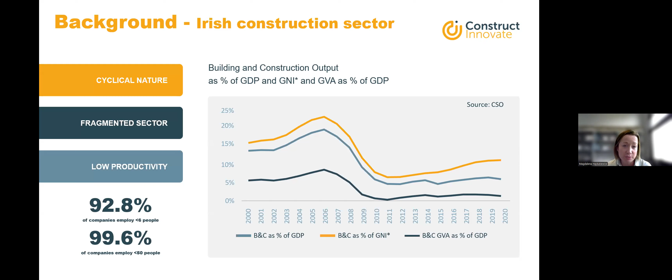The second challenge is that the sector is fragmented, with almost 93% of construction companies employing under 6 people. So efficiency and resources can be challenging when companies are small or micro companies. And finally, the construction industry has low levels of productivity. In Ireland, productivity in the construction sector is significantly below many other Western European countries, and it is also lower than in other industrial sectors.

Between the end of 2019 and the second quarter of 2024, the average labour productivity in the Irish economy increased by 6% across the country, but for construction, there was a 29% drop in labour productivity. So low productivity remains a challenge for Irish construction.

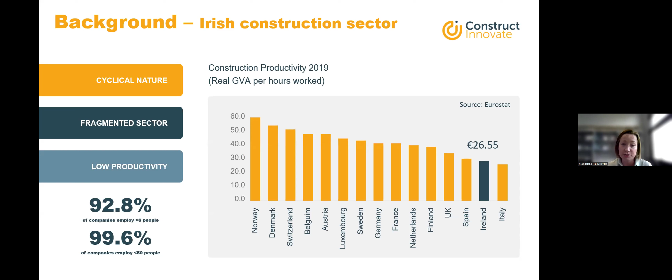There are 14 industrial ecosystems identified by the EU in their industrial strategy, and construction is one of them. Those ecosystems are transitioning due to the challenges we had with the COVID-19 pandemic, the Russian invasion of Ukraine, and the climate emergency.

Construction is one of those ecosystems, and it needs to undergo a rapid digital transformation and also embrace the circular economy principles. And the EU recognizes that need for a swift green and digital transition, as it showed in their industrial strategy, which was updated in May 2021.

And as part of the strategy, EU is working together with the member states and with industry stakeholders and developing transition pathways to identify the actions that are needed in different sectors that may give a better understanding of the challenges and opportunities that are faced by those sectors.

And for the construction, there are several tasks that it needs to focus on. So it needs to deliver building renovations faster than ever before. It needs to install renewable energy generation and manage those systems to help Europe use energy sustainably. It must continually provide monitoring, maintenance services, repair to the critical infrastructure.

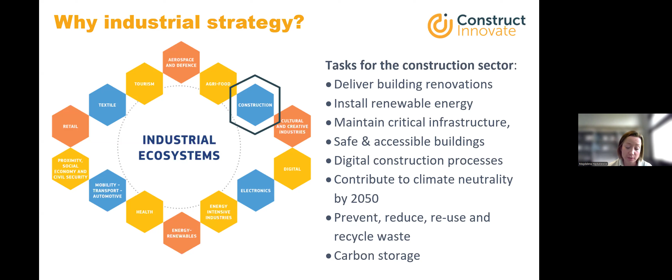So EU has this target of climate neutrality by 2050. And in recent years, different initiatives were launched that impact construction and the built environment. And those include the renovation wave, the proposed emission trading system for buildings and road transport, the new European Bauhaus, the climate adaptation strategy, and proposals also to revise some of the key legislation, such as the Construction Products Regulation and the Energy Performance of Buildings Directive.

And Ireland has the Climate Action Plan that sets a course for Ireland's targets to halve emissions by 2030 and reach net zero no later than 2050, so aligned with the EU targets. So many targets exist on how the built environment should transform in the future, but far fewer indicators exist on how the construction ecosystem should evolve to deliver on those objectives. And that's where the transition pathway for construction ecosystem comes in.

The development of a construction transition pathway started with the European Commission working with the Industrial Forum to develop a blueprint for industrial ecosystems, and that includes construction. And at the end of 2021, the Commission staff working document was published, which described the main challenges and opportunities for the construction ecosystem in Europe. Over 100 organizations participated in open consultation.

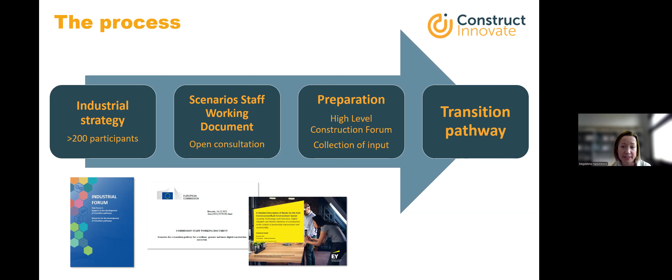And around the same time in Ireland, the Ernst & Young report was published. Some of you might know it, a detailed description of needs of the Irish construction built environment sector. And shortly after that, Construct Innovate was established as the first technology centre in Ireland for construction-related research.

So following that consultation at the EU level, after the publication of the staff working document, additional meetings and consultation sessions were organised, and all input that was received in this process resulted in a policy report, the transition pathway for construction, that was published in March 2023.

This transition pathway includes 6 building blocks, such as competitiveness, skills and talent, enabling framework, research and innovation technology, finance, and safe and fair built environment. And all those blocks must be considered from the perspective of 3 cross-cutting themes of green transition, which is the environmental sustainability and climate neutrality, digital transition, and move towards greater resilience.

Each of those building blocks has its own challenges and opportunities, which are well described in the report that is available on the European Commission website. But here I just want to flag a few actions for each of those building blocks that may be relevant to Construct Innovate members and mainly to industry.

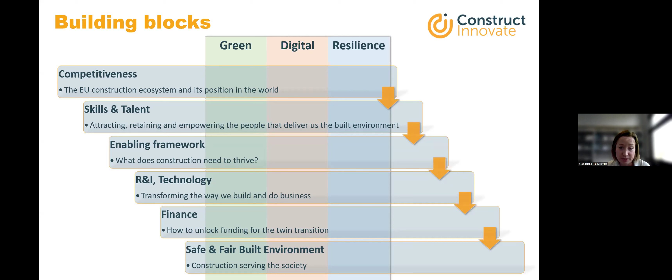So competitiveness, this building block is about assessing how construction is performing in relation to other industrial ecosystems and with third countries. It explores the dynamics of small, medium enterprises and startup community, all who are contributing to the twin transition. So when we're talking about twin transition, we mean green and digital transition and also resilience.

The recommended actions that I picked here, and there is a total of 14 of them under this competitiveness block. So the first one is investing in technologies that increase efficiency, and this relates to modern methods of construction, as shown in many previous presentations in this webinar series. Other actions relate to increasing the number of startups, improving diversity, and supporting local materials and products, and finally supporting international standardization. And that's one of the main challenges of the MMC sector, as mentioned before by our members.

The world of work is changing, and that is happening because of technology, demographic and climate change, and also the different geopolitical developments. Automation replaces some labor-intensive tasks. The population is aging, workers migrate, and the industry must reduce its environmental impact. So the talent pool of the construction ecosystem is shrinking, with aging workers retiring and young people reluctant to consider construction as their career choice.

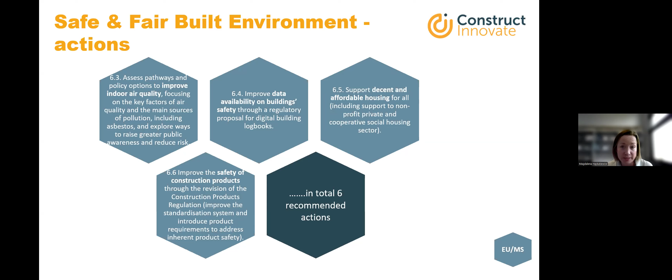So here I gave you a snapshot of the actions under the 6 building blocks of the transition pathway for construction. All the actions listed can be regrouped and positioned in time to create roadmaps for a green, digital, and resilient construction and built environment ecosystem. That's what's happening in different member states, following the guidelines from the EU, and in Ireland as well. The transition pathway for construction at the EU level and in Ireland is driven by digitization and sustainability, to improve productivity in the sector for the benefit of society.

So as you can see, this aligns very well with the vision and mission of Construct Innovate, an industry-led and industry-focused centre that enables research, development, and innovation, collaboration between academia, industry, and policymakers, and ensures sustainability, digital adoption, and resilience of the sector.

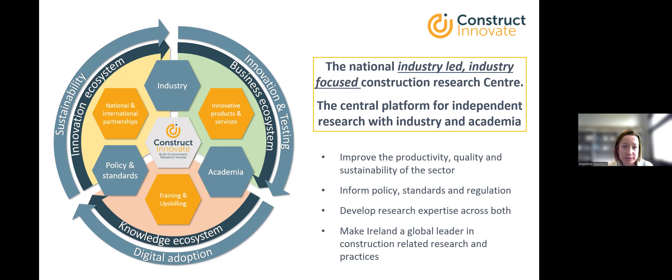Brilliant. Thanks, Magda. That's a great overview of what's happening in the EU and the pathways in the EU, but also how that applies to us in Ireland and how we're responding in Ireland. So I'm sure there's lots of people with questions for you.

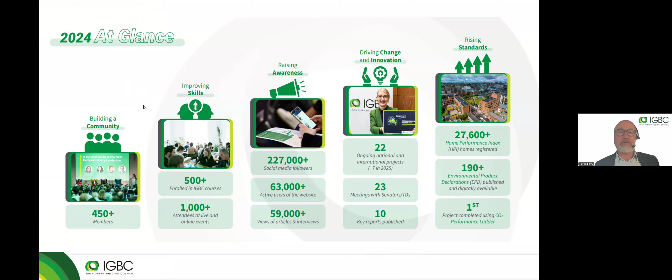Just a brief introduction to the Irish Green Building Council. We're an organisation of 450 collaborating members, and we work on skills, raising awareness through advocacy, and we do operate a number of programmes such as the Home Performance Index, EPD Ireland, and we are one of the industry research partner organisations with Construct Innovate.

You will have seen a couple of these slides before, and I just want to recap on where we are. The built environment is responsible for 37% of our emissions, and that breaks down into 23% from operation of our buildings and 14% embodied. Now, this is relatively old data. That's from 2018. So the embodied carbon proportion is likely to have increased considerably since then.

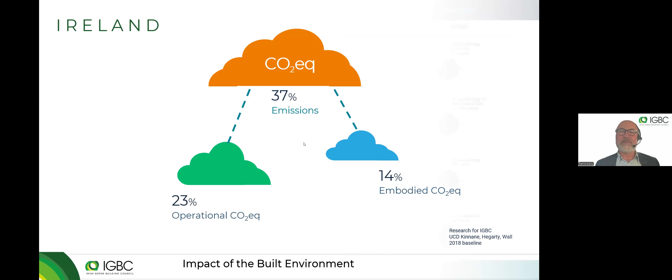We released a roadmap at the end of 2022, setting out a roadmap for each of the construction sectors, for architects, engineers, quantity surveyors. There's a roadmap here for every one of you. And one of my colleagues, Lenny, is currently reaching out to all of those different sectors and asking them what they need to act on the roadmap.

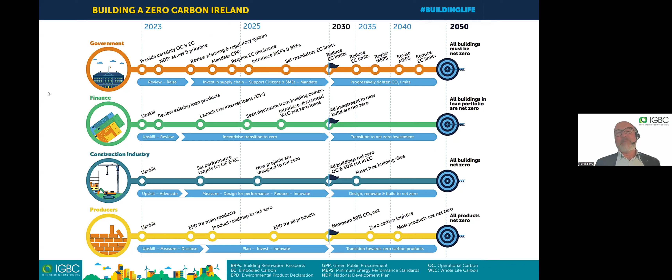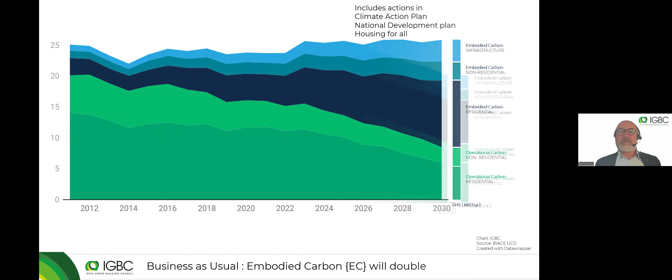I'm going to talk a little bit about how we get those whole life carbon emissions down, because that's a major challenge. We pointed out under the National Development Plan, in a business as usual scenario, if we built the 2020 Housing for All plan, even if we built just 33,000 houses the way we were building them, we would see an overall increase in carbon emissions, which means that we have to look at scenarios for reducing carbon emissions.

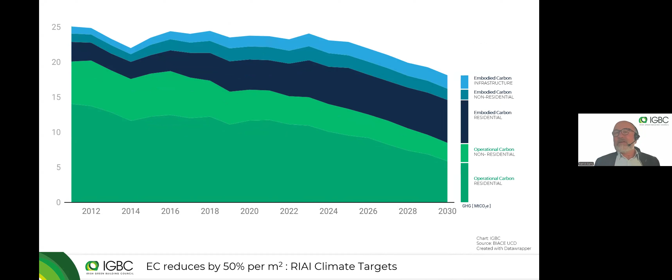So even if we reduced the carbon intensity per square meter, and met the RIAI climate targets, which are quite onerous, then we'd see a reduction, but it wouldn't be enough. So how do we get down to a 50% cut in carbon emissions from the built environment? And it's becoming all the more challenging as we increase our targets to 65,000 houses per annum.

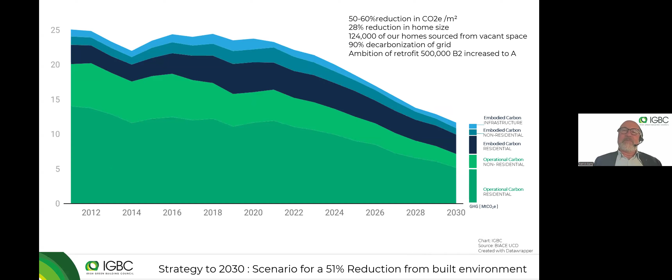But actually, where I would have been quite pessimistic a couple of years ago, so much has happened in the meantime in technology and ideas and new materials. I think there is the potential, because we probably need to be targeting something like a 70% reduction in carbon intensity, but that might just be possible over the next couple of years.

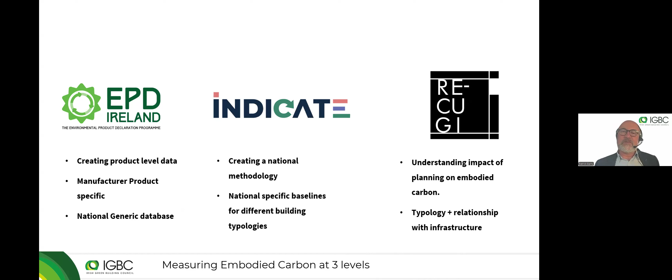So the Indicate project essentially helped us create a baseline for Irish buildings using a common methodology that we worked on with the University of Galway and through Construct Innovate. And that gave us an indication of what the carbon impact of different types of buildings is currently, and gives us an idea of where we need to get to over the next 5 to 6 years.

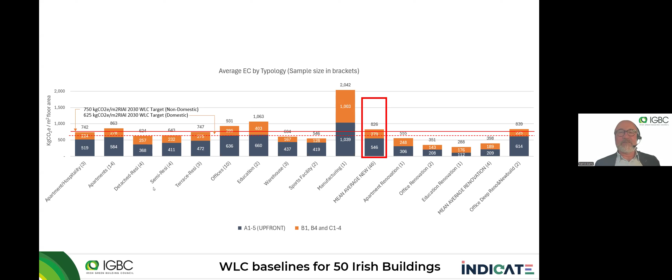I'm not going to go through the detailed figures for those benchmarks, but it's probably more instructive to see where most of the carbon emissions and most of the mass of our buildings is in those 50 new buildings. In those 50 new buildings, 3/4 of the mass of the buildings is from concrete, with metals and other materials like brick making up the balance. And why is that important?

We're also doing a circularity roadmap at the moment. So we're not just thinking about the carbon emissions, we're also thinking about the actual resource. Where do we find these resources, and can we optimize resources like concrete and sand, all of which we assume are in plentiful supply, but they do have considerable impacts to extract, not least on biodiversity.

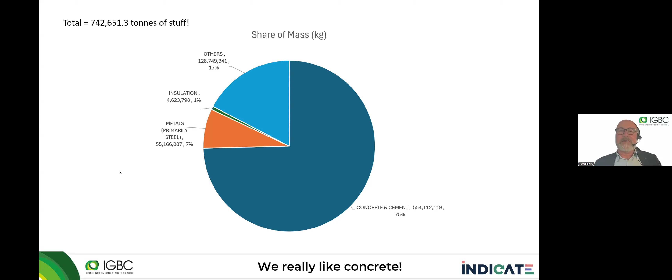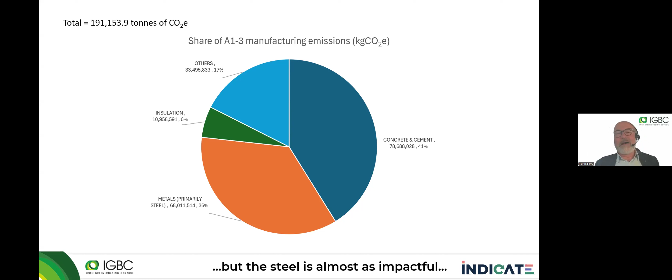And when we look at this from the carbon emissions of these 50 buildings, we see that concrete and cement is still the largest at 41%, with steel being 36%. And surprisingly, insulation has quite a significant impact when you look at it. It's quite a light material. You don't even see it on the mass diagram there, but it's a significant impact in carbon emissions.

So how do we get down to, we're targeting something like a 70% reduction in carbon intensity. How would we go about, or even a 50% reduction in carbon intensity from all of what we are going to build over the coming years? And again, you'll see the idea of a pyramid. It really starts with sufficiency. How can we be clever by building less? How can we find ways of intensifying the buildings that we already have, so that we don't have to build as much?

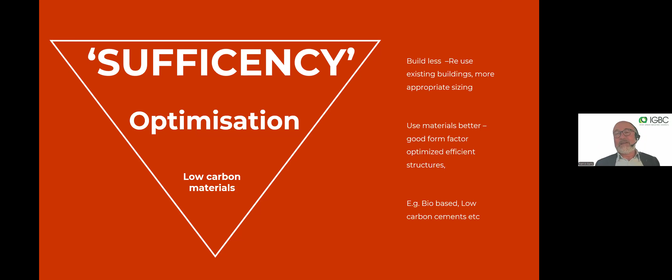Then the next step in the pyramid is optimization. How can we use less materials? Can we optimize the structure? And I know the Institution of Structural Engineers in the UK has done fantastic work there. I don't know if you've seen the Build Opt project, where the UK government funded a project looking at how you can optimize the actual structure itself and the layout of the columns and the bracing. But there's also other measures that we can use through 3D printing that can optimize the quantity of material used. And then finally, the lowest part of the triangle is that the materials you use themselves are low carbon.

So one of the low-hanging fruits starts with the infrastructure, and we haven't really started to think about that because we've been looking at the buildings. So even if you're looking at the infrastructure, how you lay out developments, is there an optimum way that you can lay out the roads? So that not all of the roads need to be for heavy vehicle use, say in a housing estate, and could we optimize some of the roads and pathways for lighter vehicles like electric bicycles? Can we optimize car parking and reduce the quantum of materials going into urban development?

Again, this project carried out through Construct Innovate, Viable Homes, looked at the difference in infrastructure according to different typologies. And you can see the lower the density, the greater the ratio of infrastructure to the actual buildings themselves. Then it decreases right up to apartment blocks. And it's interesting talking with developers that actually the greatest cost in lower density development tends to be the infrastructure now rather than the homes, because they've optimized the units themselves, but they don't have as much control in optimizing the infrastructure that's required by the standards.

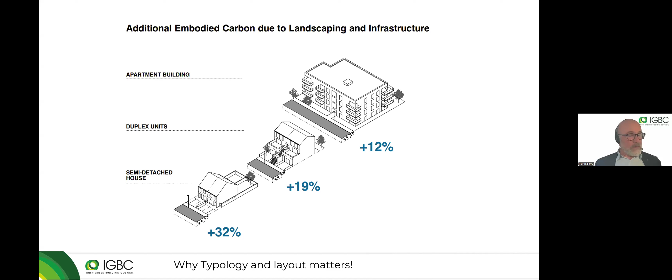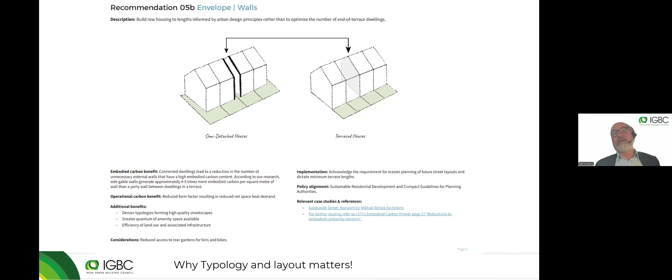So there's obvious simple ways we can change the typologies. Rather than having lots of detached houses and semi-detached houses, we can put them together. That eliminates walls. It reduces foundations. It reduces the length of the pipes and footpaths that you need because you're pushing the houses closer together. You don't need as much infrastructure. You can look at the car parking, perhaps moving the car parking slightly away from the houses. You can group them. Then maybe you don't need the same level of road infrastructure. So there's huge low-hanging fruit there if we look at the layouts of developments.

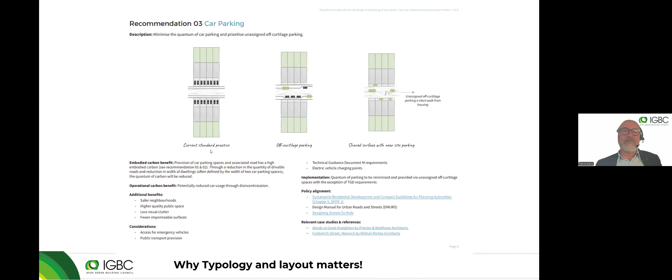A very obvious one. And a lot of this work was done by Philip Comerford and the team in UCD with Oliver Kinnane. They did an immense amount of work looking at every manhole. They downloaded standard manholes and calculated the impact of a manhole, and the impact of the road build-ups that we typically put in per square meter in a housing estate. So they calculated all that out. And this is just one example of the way we put in infrastructure. It's different for houses because we put in a last manhole for every single house. With an apartment block, it might be just one manhole. And when you think about that, that's 1.2 tons of carbon per manhole. So there's lots of things that we can optimize.

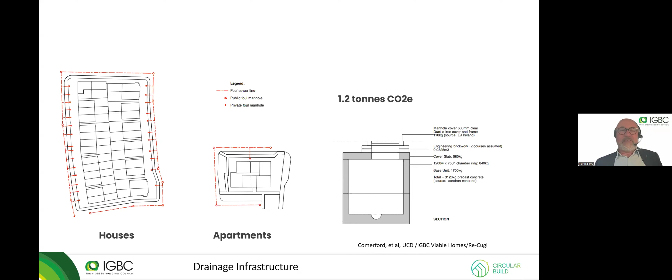And I can talk about the impact of this, but what could this look like? Well, this is an example that's already under construction in Copenhagen, where it's built on a municipal dump. It's built on landfill, and it is close to a metro station. They've backgrounded all of the car parking. They've hidden away all the car parking in a multi-story car park at the entrance, and they've cut down the amount of infrastructure to the minimum. They've used swales instead of attenuation tanks.

Actually, on that study from Construct Innovate, the attenuation tank accounted for 2.4% of the entire embodied carbon emissions of the entire development. But they're using nature. So they're bringing biodiversity right through the scheme. The only roads through it are narrow cycle tracks, a minimum of vehicle access needed for fire and obviously other utilities. But it's an example of where we might be going, and it's clearly a more beautiful environment to live in.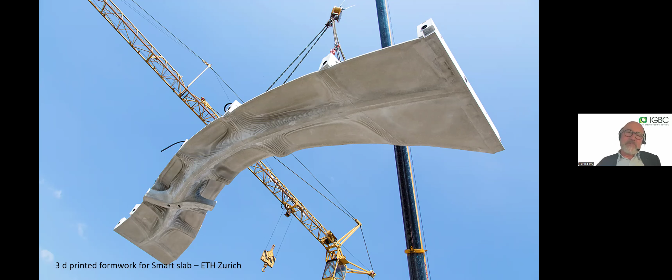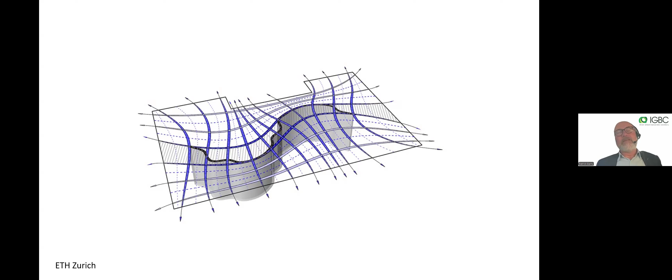But it's not just timber. There's ways that we can optimize concrete, and this is an example from ETH Zurich, who are building this demonstrator to show all of the benefits of combining digital parametric design, where you're optimizing the structure to absolutely bring to a minimum the amount of concrete. So, for example, this is a 78 square meter slab. The total weight of it is 15 tons. It's got a 4.1 cantilever. So it's 1/3 of the mass of a typical concrete slab.

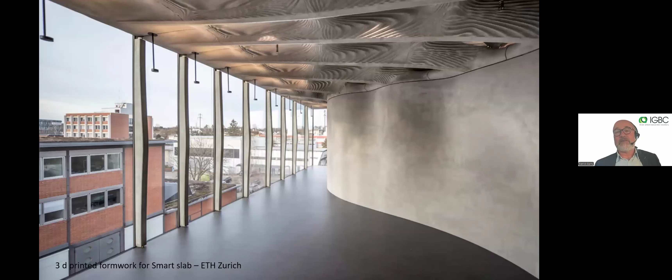So when you think about that, if you combine the fact that you can now use clinker substitutes that can replace up to 70% of the clinker, combine that with a 70% optimization. If my maths is correct, and correct me if I'm wrong, that means there's a 91% reduction in carbon intensity in building that. If you combine those, you're combining digital, you're combining low carbon cement and concrete techniques, and you're combining parametric design. And you're getting very interesting shapes. Now, this is a little bit extreme, but we don't have to go that far. We can apply it to ordinary buildings too.

But of course, we've maxed out optimization in the last slide, but then we have new options that are coming through. We're not really yet realizing the potential to use biomaterials in Ireland, and we have plenty of agriculture. We can offer farmers the potential to diversify on their farms and create new agri-crops.

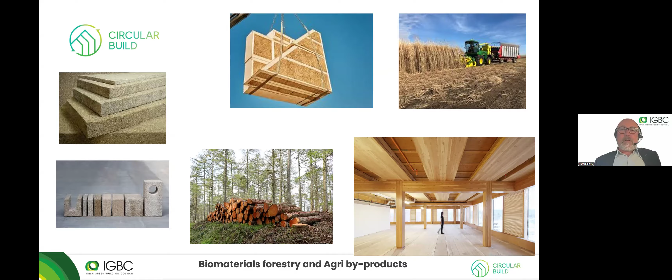And again, currently the Timber in Construction Steering Group are looking at use of timber at height, and this is an example from Stockholm where they have built 5 stories above an existing 2.5-story warehouse. And this is combining strategies. You're using what you already have. You're using low carbon materials then to intensify the use of that. And then you're using that existing infrastructure that's already there, the roads, the drainage. So this is the optimum way of reducing carbon by multiple strategies combined.

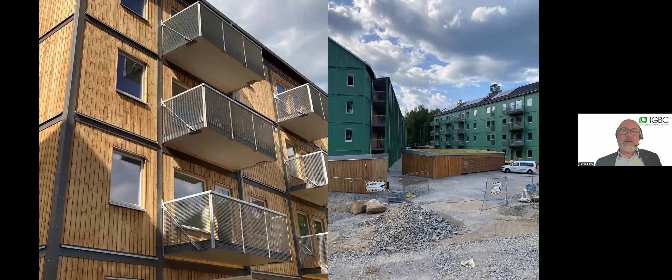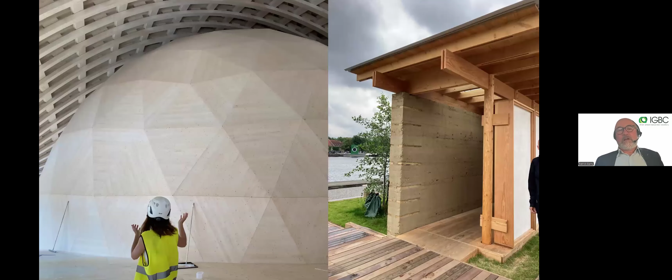And again, the use of parametric design, of course, can be combined with new biomaterials. This is a cross laminate. Sorry, this isn't CLT. It's cross lumber. It's cross ply, where you're using ply in cross ply to achieve very interesting shapes.

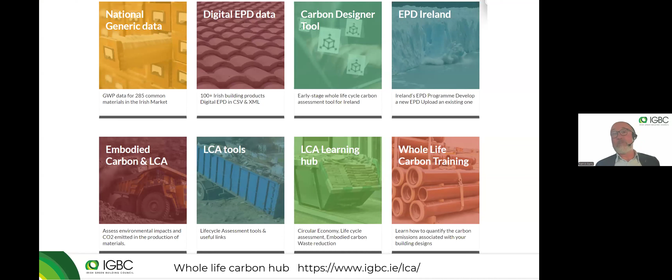So the possibilities for construction, it's an incredibly exciting time if we realize them. And it gives me a lot of hope. Whereas a couple of years ago, I said, this is really difficult. How are we going to make these reductions so quickly? But I do think it is possible if we apply all of these techniques in combination.

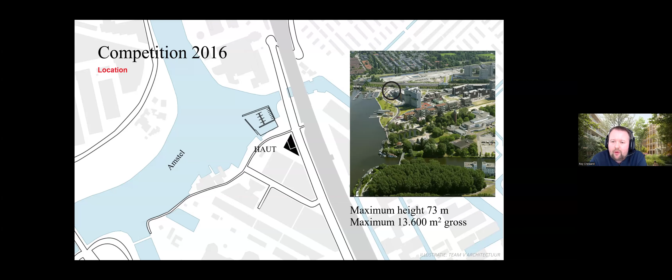And in order to secure, let's say, development of this plot, the municipality set some rules, and they asked teams to come up with a strategy, and you were to be scored on these criteria. So the design of the building was about 40% of the points. The approach to sustainability of the building was about 30% of the points, and then the associated bid for the land and the rights to develop on this plot were another 30% points.

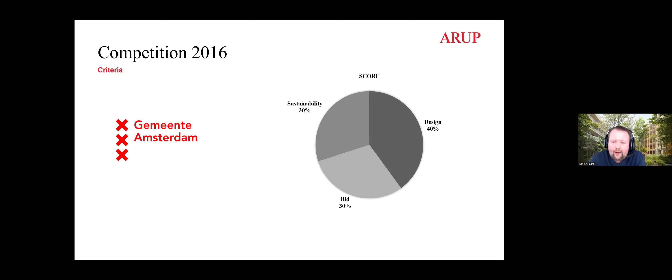We teamed up with Lingotto, who is a Dutch developer, and Team V Architects, which is one of our architecture friends in Amsterdam. And as Arup, we supplied many of the engineering services on the project. And as a team, we felt that the key to winning this project was to come up with a structure that used as much timber as possible. This was back in 2016. Timber was very much talked about in the Netherlands, but the largest building constructed at that time was about 6 stories tall. And we wanted to really make a statement in terms of applying this material in construction.

So the idea of our team was to use as much timber as sensible, whilst not compromising on the architecture and the views of the buildings. These were going to be very high-end apartments, so we wanted all the apartments to have excellent views, so we didn't want to have any structure on the outside of the building, but very much centrally located, and also work within the constraints of the site, which had quite an awkward triangular shape. There was a large segment of cables under a part of the building, which was a constraint as well, and we really wanted to work with those constraints.

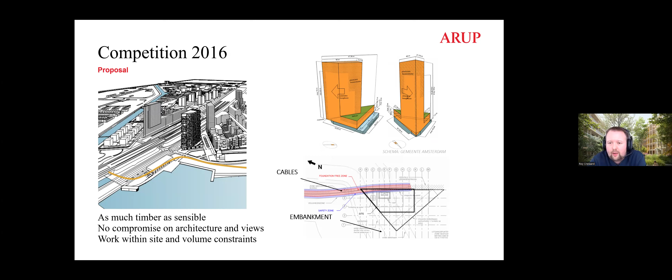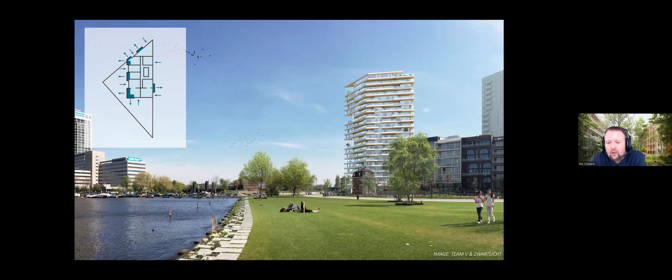So in the end, we came up with a design that you see here, which was one of the images that was submitted during the competition, where the use of the timber didn't really impact the design much. So we really had clear views all around the building and a very strong architectural expression. So why didn't we do this before? Why was this our first project to have a 70-meter tall tower in timber?

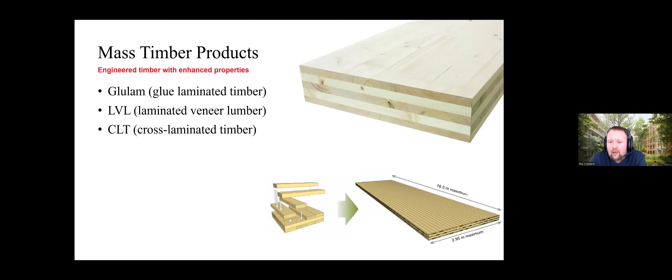Well, first of all, we've seen the rise of mass timber products, which are products that have much increased properties compared to traditional sawn timber products. These engineered timber products really allowed us to use timber at this scale. Furthermore, as you are probably well aware, the modern ways of fabrication have really helped us to realize these kind of projects.

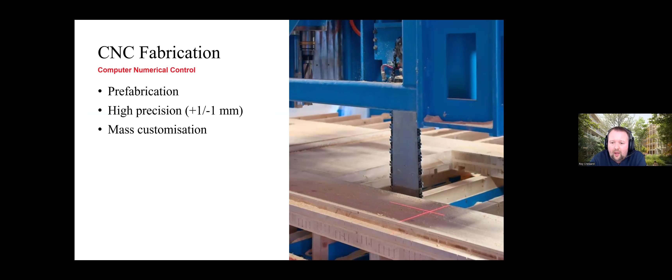For example, with CNC machines, you can really have a high degree of precision and apply mass customization to the structural elements required for these projects, and apply that in a prefabricated manner where floors and walls and columns, etc., arrive on site and can be installed right away. And finally, one of the enablers for this project was new connection technology.

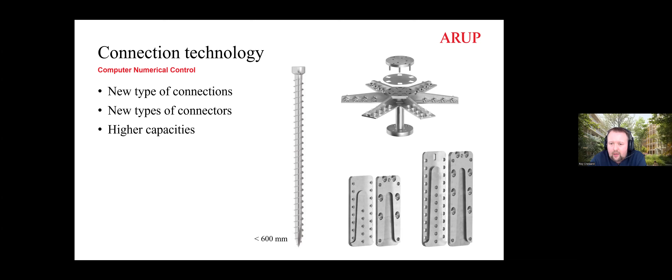There's been a real increase in the technology of timber connectors, with higher and higher capacities being possible, really tight tolerances, and this is constantly evolving and really helps us with applying timber to this scale.

So for the design of HAUT, we applied a hybrid structure, and the reason for that was that we initially pushed for as much timber as possible, but in the end we settled for CLT walls, a concrete core, and timber concrete composite floor. So that's a timber slab with a concrete topping that really helps in the structural performance.

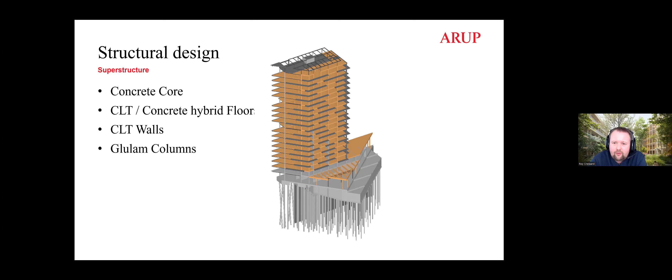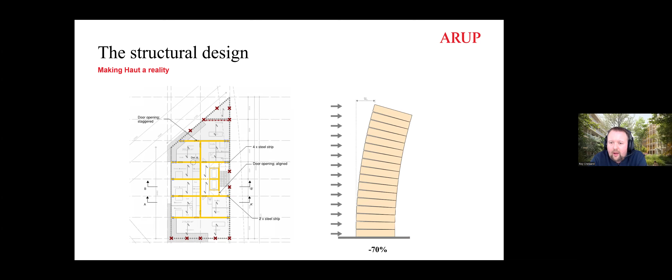So why did we end up with this system? Well, initially we really pushed for a full timber design. This is what was used in the competition stage as well. But we found out that if you stack all these structural elements to this height, a timber structure is made out of all these individual panels with all these joints, and they all have connections in between them. All these connections have a bit of slip in them. They have a bit of give, and that actually reduces the stiffness of the whole quite significantly.

So we investigated a couple of options where, for example, we used steel strips and ties to stiffen up those timber walls, maybe pre-stress it to avoid those deflections. But in the end, we found that we had to add so much steel that it basically offset all the carbon and the environmental gains that we had by applying the timber.

So instead, we opted for a very small and compact concrete core, which also helped us, for example, with acoustics. Put all the vertical transportation in there, all the bits that vibrate, and it's quite nice to have that compact in that central core.

But that core is supported by a number of CLT walls that sit next to it, and that support the structural system, especially in torsional modes of the building because of the asymmetric position of the core. We use the CLT walls for that. So in the end, this hybrid solution with concrete applied to sensible locations reduced the overall environmental impact of the plan.

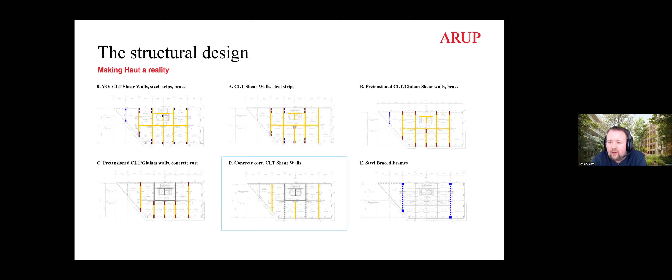So we had a number of design challenges during the development of the building. One of them was the differential settlements of the building. You can imagine that if you use concrete elements next to timber elements, there's going to be differences in settlements due to the creep and shrinkage of the timber and the differences in loading. So this was actually a big concern for the contractor, but also for the architect who worried about finishing delaminating from the walls and such.

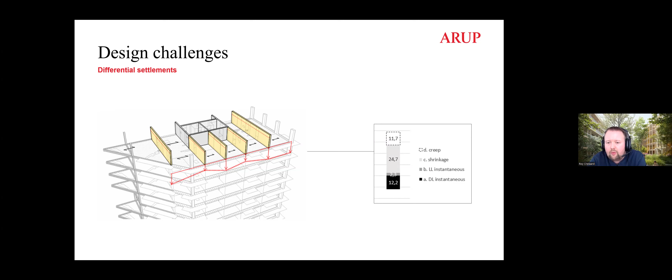So we performed quite a detailed analysis of this in time, where we looked at different scenarios, applied the loadings at the right times to really understand the differential settlements and the way they evolved in time. And eventually we were able to much more accurately estimate these differential settlements to be about 20 millimeters instead of our initial estimate of about 50. So that made it much more manageable.

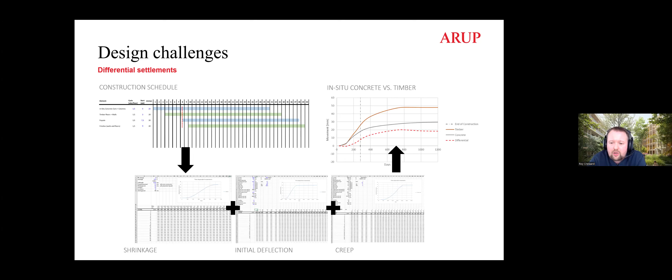And we also introduced some connection details that would be able to take any differential settlements and distribute them across the floor, which resulted in much smaller rotation. So that was solved in quite an elegant way.

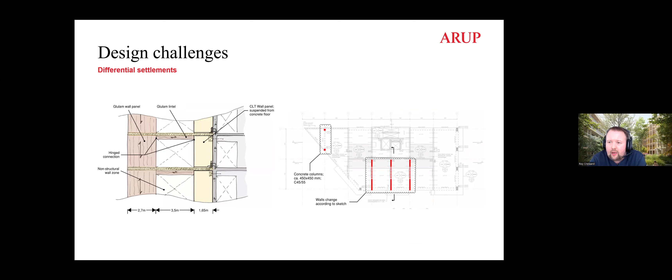Furthermore, for these types of buildings with timber floors, footfall-induced vibrations are a big concern, especially for apartments like this where they are quite high end, so the requirements are quite tight. Which was one of the reasons why we opted for a composite slab, where there's actually a CLT soffit, which is then with shear connectors connected to a much thinner concrete layer on top, and they work compositely.

So it tremendously increases the strength and the stiffness of the floor elements, but it also adds a bit of extra mass, which is really beneficial for your vibrations, but also, for example, wind-induced vibrations for the complete tower. That small layer of additional mass really helped us in that structural performance.

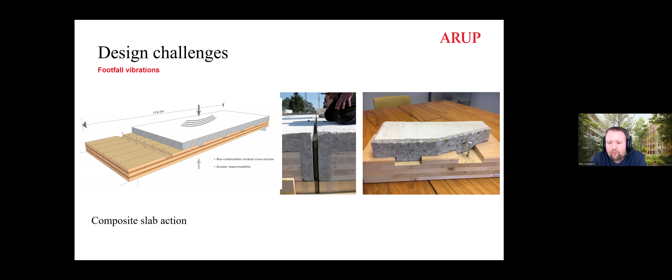It also really helped for acoustics, which is another issue that you need to tackle with these timber buildings. Timber has a much lower mass, which means that both direct sound transfer from one apartment to the other, but also the flanking noise through ceilings and through floors becomes an issue. And again, we use that layer of concrete, but also a decoupling at the detail to avoid that as much as possible. And in that way, we were able to avoid drop ceilings in most locations altogether.

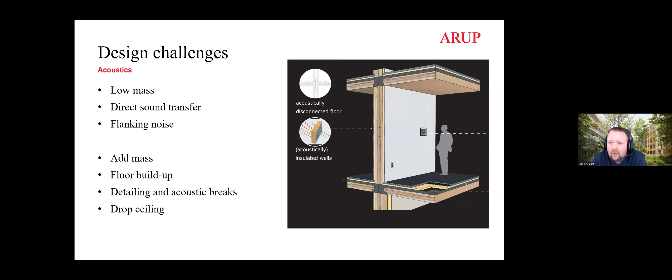And then finally, the fire safety of the building was obviously a concern, which is a whole presentation in itself, I would say. I think the key message here is that timber really behaves much differently from other, more traditional construction materials such as concrete and steel, which also means that we had to develop our understanding of how timber buildings behave in a fire situation.

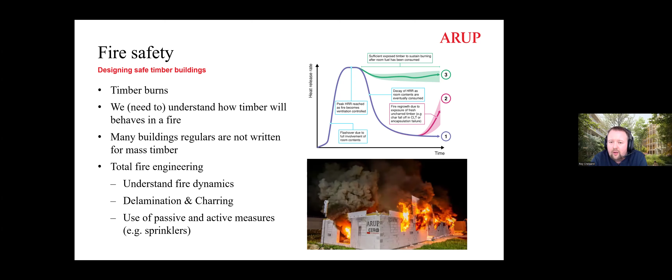And in the end, for this building, a sort of total fire engineering approach was chosen, where we tried to understand the fire dynamics much better and made really informed decisions on avoiding, for example, delamination of the CLT by choosing the right glue, applying a sprinkler, as well as other passive measures to achieve a similar level of safety that is typically intended by the building codes as applied to traditional materials.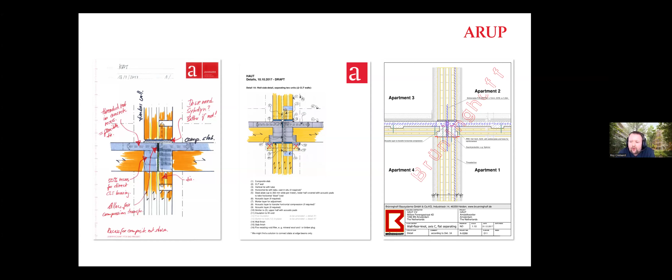And I would say that a key challenge here was developing an economical as well as a technical solution that would feature these flexible floor plans, have that transparent facade that I showed earlier, and have visible structural ceilings, timber ceilings. And especially with 21 levels, it also needed to be easily constructed and satisfy all the requirements for structures, fire, acoustics, and so on.

So I think the solution with a custom designed precast timber concrete hybrid panel applied in this platform construction really helped in that sense. And that was really developed iteratively in an integral design approach together with the client, the architect, as well as the timber and concrete subcontractors.

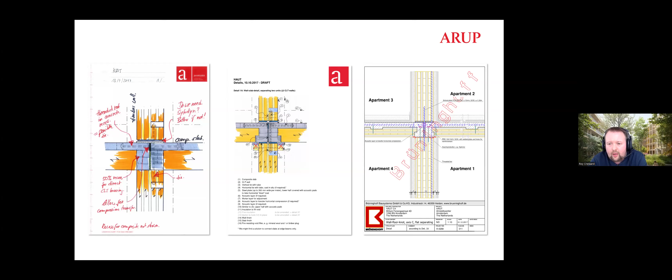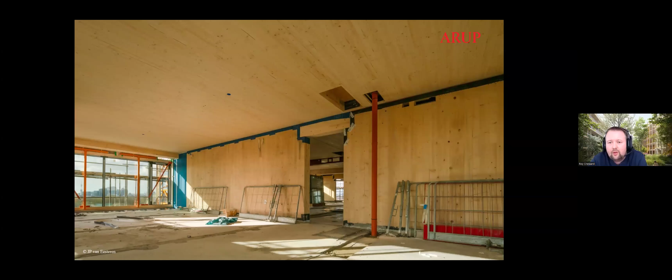So some pictures from construction, which you can see here. You see the concrete core going up and the timber shear walls around it. Inside, you can really see that there actually is a lot of timber in the building. You can see the timber soffits, the walls, which would later be covered. The ceiling would still be visible.

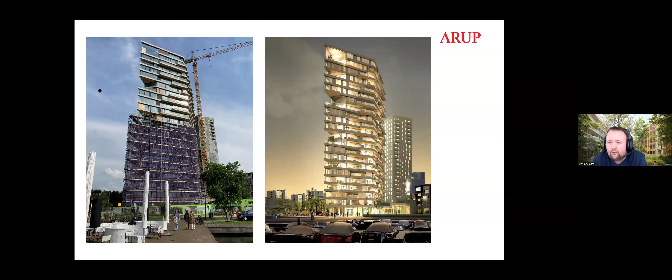MEP integration also makes for a very interesting challenge in timber buildings. On the one hand, it really allows for ease of installation, but on the other hand, especially penetrations through beams are much more of a challenge. So that required a lot of coordination. But in the end, I think the end result looks really good, and it remains very true to the original intent of the competition.

And the project actually won some awards. It's won a BREEAM award, but also at the Structural Awards 2023 it won the overall structural award as well. So I think that's a nice recognition of the work done on this project.

Then quickly, there's a second project I wanna highlight briefly, which has more recently been delivered, which is the office building for DPG Media, a large Dutch media firm. And again, this is a hybrid structure where timber is applied where it really makes sense, but it also features concrete again in the cores and in the timber concrete floors, in a sense that it makes sense for the design.

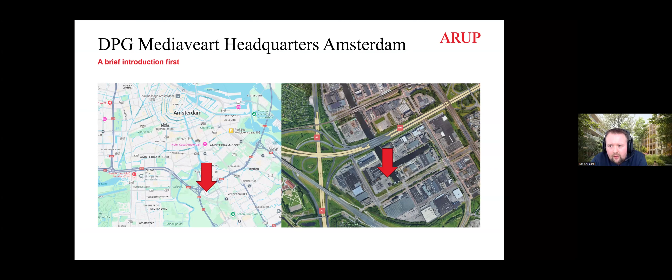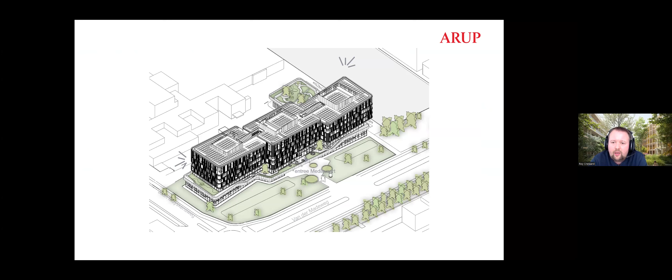So this building is located again in Amsterdam, just outside of the city ring, and it's one of the largest timber concrete hybrid offices in Europe. You can see the design here of three blocks in a staggered approach on a shared plinth and quite a deep parking basement underneath.

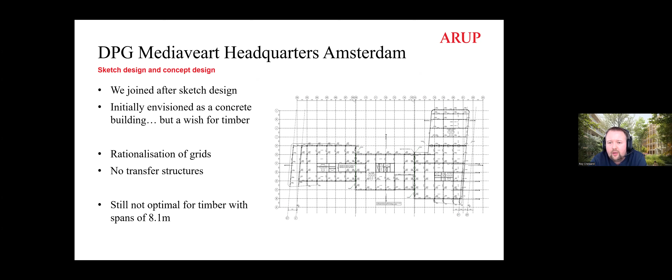We as Arup joined this team only after sketch design, which means that already a design iteration was done and the building was envisioned initially as a concrete building, but there was a wish to apply timber. So what we did first was we rationalized the grids as much as possible, got rid of the transfer structures as much as possible, but in the end we were left with quite long spans, 8.1 meters, which is quite a challenge for timber.

So what we did is we actually developed three options. We developed a concrete scheme, a hybrid scheme with concrete cores and timber concrete composite floors, and a full timber scheme. And together with a cost consultant, we looked at the additional cost of these options compared to the concrete scheme. And we calculated that there was about a 3 to 5% increase for the hybrid option and about 10% increase for the full timber option.

And our client, DPG Media, made a very conscious decision to go for the hybrid option, where they felt like they got a significant increase in sustainability, in performance of the building, for quite a small increase in cost. And furthermore, with this hybrid option, we were able to shorten the construction period by about 5 months.

And DPG Media at the time had many offices all through Amsterdam, and a lot of the lease contracts were about to end. So with that 5 month increase in speed to market, they were actually able to save a lot of money on all of their leases.

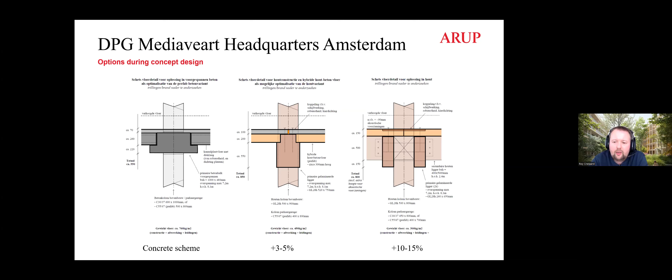So they made a very conscious decision for the timber hybrid option. And of course, there were other knock-on benefits. We could reduce the foundations quite significantly, the structure in the basement, so that all helped as well. And we actually found that now that the building is realized, that sort of 3% initial cost that they paid, when you look at the value of the building now, it's actually worth much more, both from a monetary point of view, but also the users, all of their employees, they are extremely happy with the building.

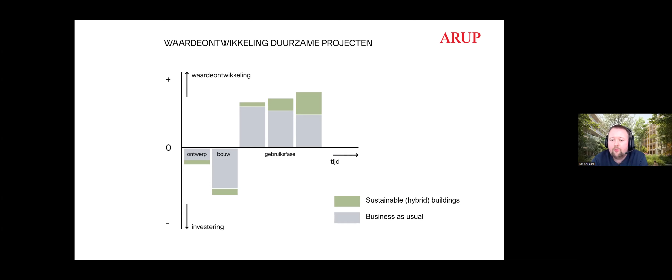This building is located outside of sort of the ring of Amsterdam, so they really wanted to make a beautiful building to make all the employees happy, because they were initially not so keen to move out of the city center to a slightly more outside location. But now that the building is realized, they really enjoy it actually.

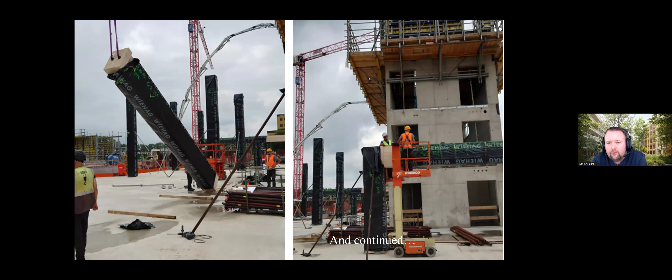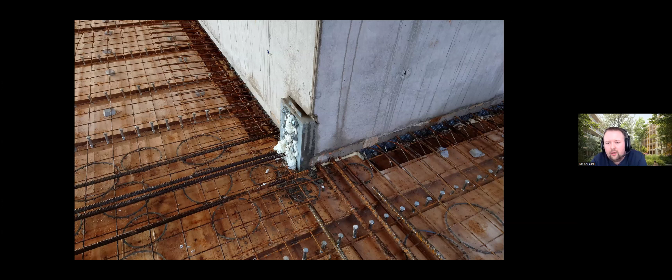So just to wrap it up, some pictures of construction. So you can see the two-story basement being realized here with the concrete structure, the timber columns going up. You can see the concrete core being realized. The timber floors. In this case, it was chosen to have an in situ TCC floor, so the concrete is poured, is cast on site. So you can see the grooves with the dowels here, the reinforcement on top, which is connected into the core, obviously, and then the concrete is poured on top with some propping underneath, again because of the large 8.1 meter spans.

So the building has now been finished, and it was actually opened recently by the Dutch king, which is quite exceptional actually, because he usually doesn't open any buildings, only public buildings. And the building also won a couple of awards, so best Dutch office building and best Dutch timber building. So again, that's quite a nice recognition for this timber hybrid building. Yeah, that's it from my side. So very quickly, a brief overview of two of our recent projects, where we try to achieve a sustainable and future-proof building by means of this hybrid construction.

Brilliant. Thanks for that, Roy. That's fantastic. Two very exciting buildings. Also nice to see some numbers there in terms of the decision making from the client that's willing to pay that 3 to 5% initial capital cost up front to go to a hybrid concrete timber scheme over concrete, and then to actually work out that the value of the building afterwards is probably higher than that additional cost because of going to that scheme. And then if you take into account productivity of your staff on top of that, they probably have gained that initial capital investment back already fairly quickly.